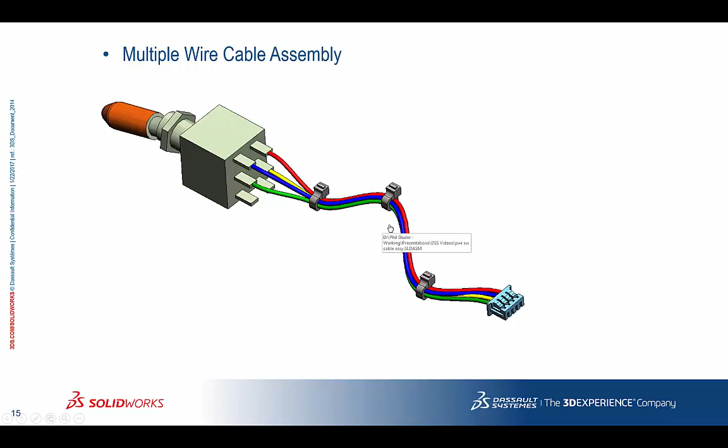Did you know how to make a multiple wire cable assembly? Let's take a look. Okay, what we've got here is a subassembly that will be inserted into another assembly at some future point, and we're trying to make cables or wires to go in between all the connectors and the switches and through the

zip ties. What we're going to do is we're going to insert a new component, and this new component is going to be the actual wires themselves. SolidWorks is asking for the front plane of the new part, and I'm just going to pick the front plane of the assembly, and it automatically opens up a 2D sketch, but that's not what we want, so I'm going to get out of that sketch.

And then I'm going to open up a 3D sketch. And in that 3D sketch, we're going to put some splines. Okay, so the pink sketches were part of the original switch. The orange sketches are part of the zip ties, and the red dots right there, the point entities, those are sketches in the connector. So I'm going to make the path of our new wires go between all those points.

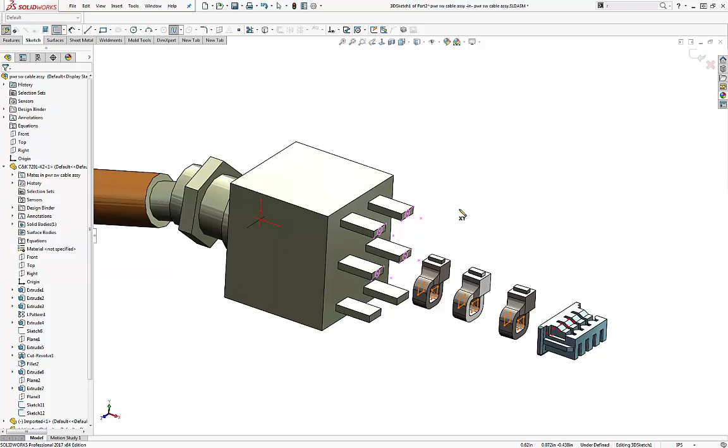So if we zoom in, I'm just going to pick these points in 3D space, and we're making in-context references to all those other sketches, and we're just going to take our spline and feed it through all these points. Okay, there's our first path.

Now let's make another path out of another spline. We'll just make two here. One there. This one's perpendicular to that, basically. Now we're going to go through the zip tie. Get through all the zip ties. And then we're going to go to a point on the connector. Okay, so there's our two paths for our sweep.

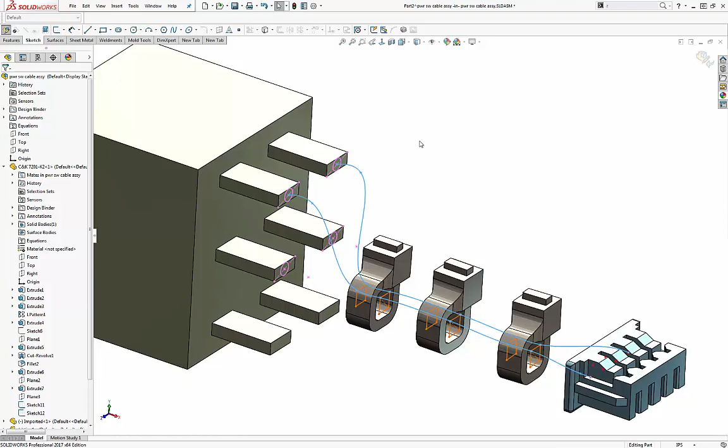Now we need to make the profiles of the sweep. I've got this pink sketch here on the switch, and I'm just going to open up a 2D sketch in the part we're editing right now, and I'm going to convert those two circles into our profiles. We're putting them both in the same sketch. Okay, so there's our two profiles we're going to use to make our wire.

Now, it's important at this point that we actually hide the pink sketch because it's real easy to get confused. These are the ones in the new part we're working on right now, and we don't want to pick the other ones that were in the sketch. We want to make sure we use these profiles for the sweep.

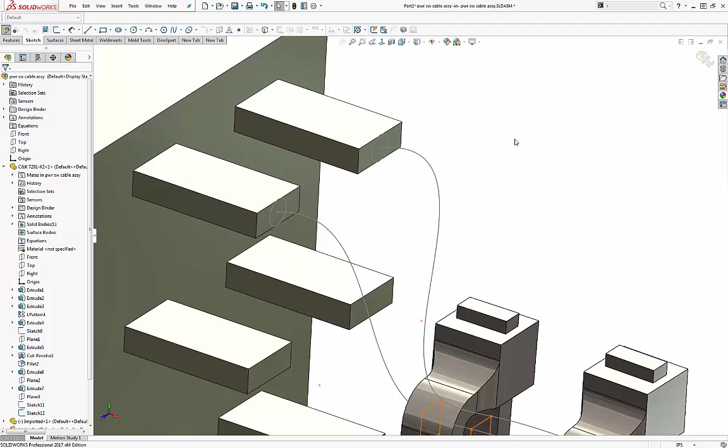Now I'm going to go back. We're still editing the new part. I'm going to do a sweep. I'm going to use the selection manager to pick a closed shape for our first sweep. And then I'm going to pick an open shape for the path. And there's our first sweep.

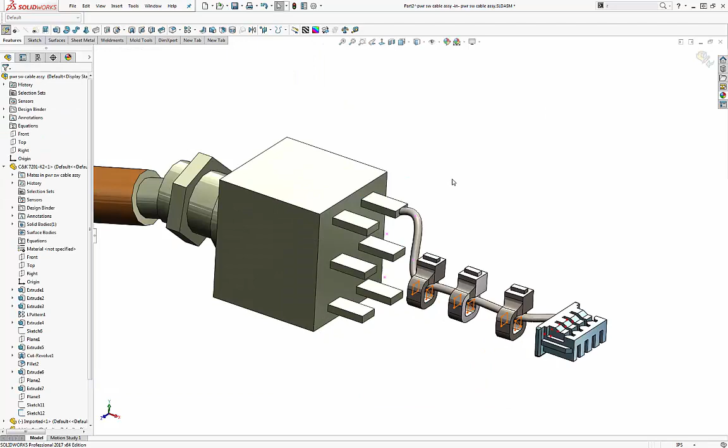I'm going to do the same thing again, but see, the sketches were consumed, so I got to come down here, and I've got to open that up and show those two sketches again to see them again. So there they are, they're back. Now I can use them for another sweep feature in our new part.

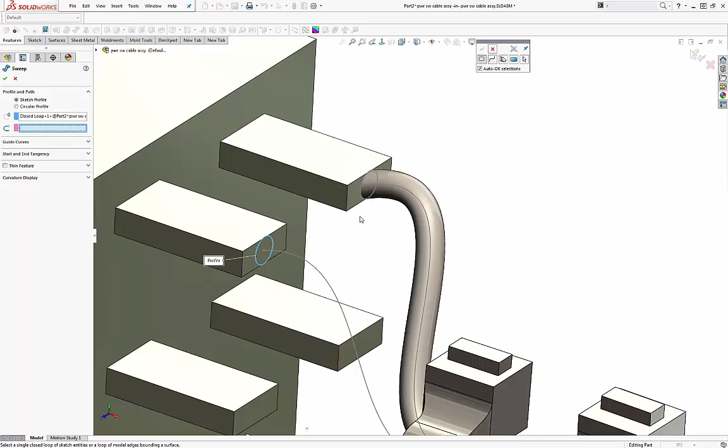Closed shape, this contour right there. Open shape, this path right here. Now we can say okay, and there's our second. Now, wanted to be careful. Let's go back and edit this feature. I want to make sure. No, didn't want to edit the part, Phil. I wanted to edit that feature right there.

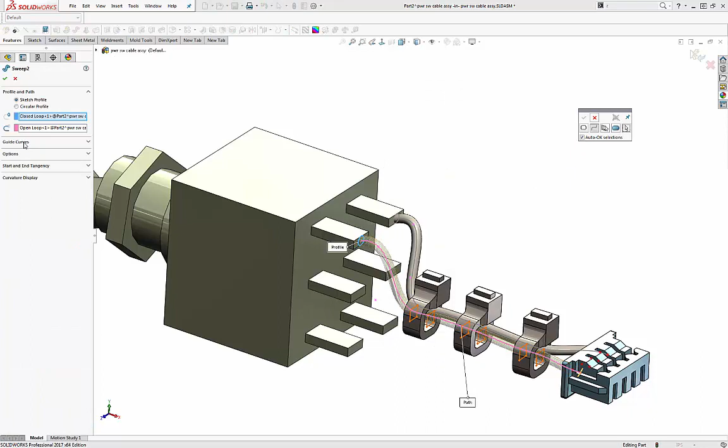I want to make sure I have merge result turned off because we actually want two different bodies. Because one of the things we can do with those two different bodies, you can look here and see those bodies, we can actually change the color of those. So we can change one to maybe red and one to green. And we can change those colors or appearances to whatever we want.

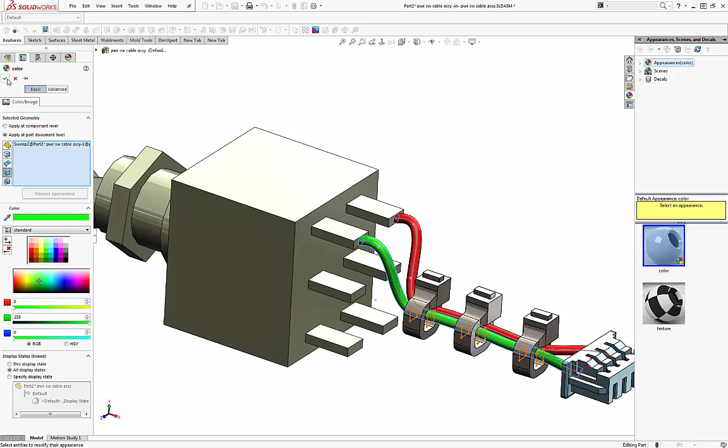And since they're individual bodies, also SolidWorks doesn't try to merge those. If these are just barely skimming each other, SolidWorks may have a little trouble trying to merge them because they're barely touching, then they're not touching, then they're barely touching again. And that really causes some CPU messes and some confusion with SolidWorks. So it's better to just make them separate bodies. And then if they overlap just a little bit, it's not really going to hurt anything.

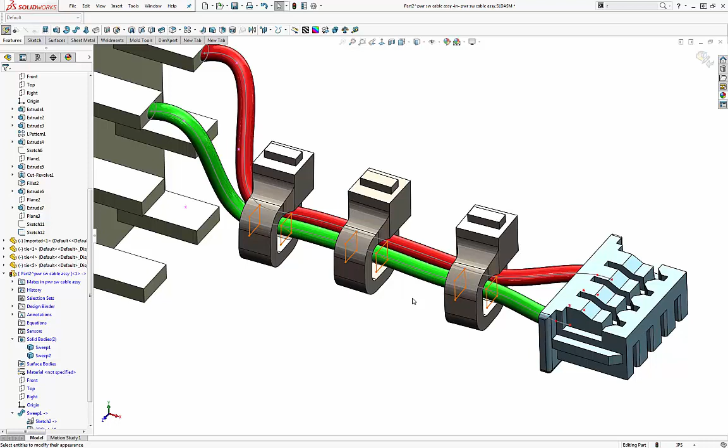And now we can get out of editing that part, which was the brand new wires. And now we can take these connectors and these zip ties and put them pretty much wherever we want within reason, and then rebuild our assembly, and we see our wires will follow along.

So that's one way to put wires or tubing or hoses or whatever you need through an assembly, and just quickly do it by referencing the other components that are at the ends of the wires or at the middle of the wires.